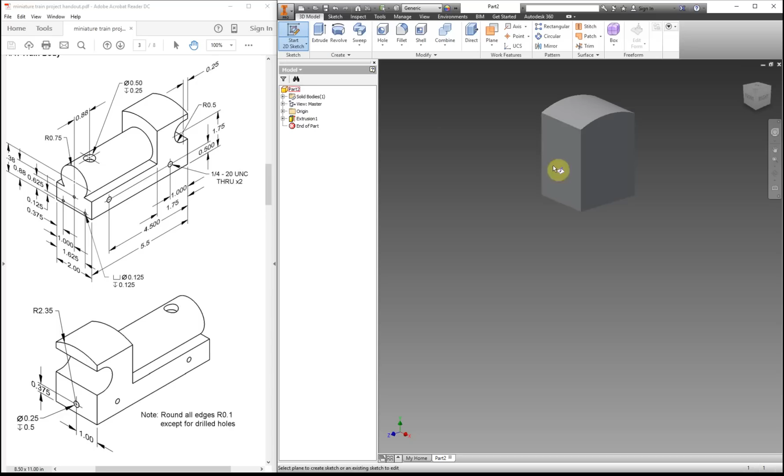So what I'm going to do again is another 3-point rectangle. So I'm going to click on this edge, that edge, and I'm going to move this up. And this dimension from here to here, if we look back on our sketch, it's going to be this line. You're going to look over and right here. So 0.88.

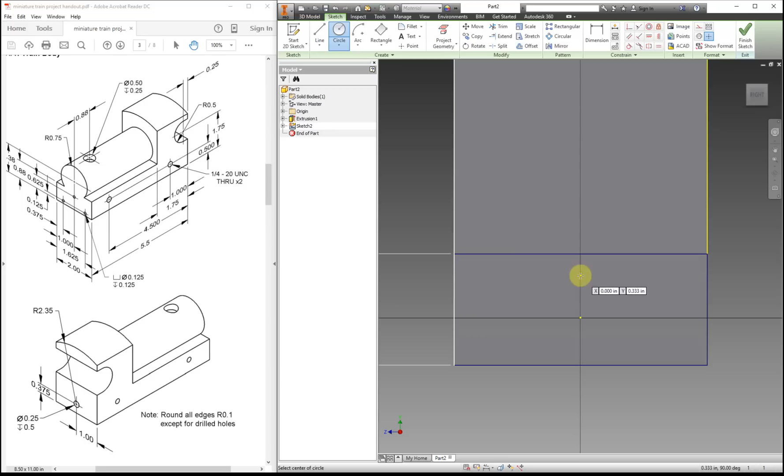The next thing I'm going to bring in is a circle. So I'm going to try to get the little dotted line to show up. I'm not sure if you can see it in the video, but there's a little dotted line that'll show up right in the center. Kind of helps line everything up. And you just want to make sure you don't connect it to there because that's not where it should be. So just click a little bit further down for right now. Okay. So we're going to dimension this to the center just to make sure you got it in the right spot. Also, it locks it in place.

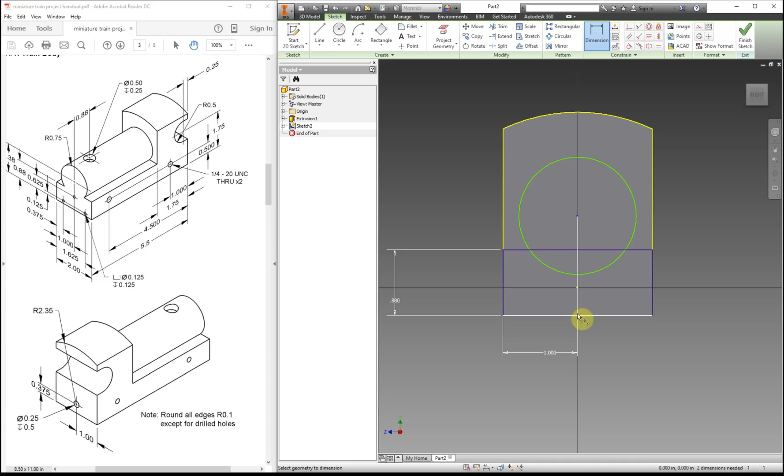And now we want to lock in the center of where that should be. And if we look back on our sketch, here's the center. And it is, let's see, oh, it got cut off a little bit. There it is. So 1.38 inches.

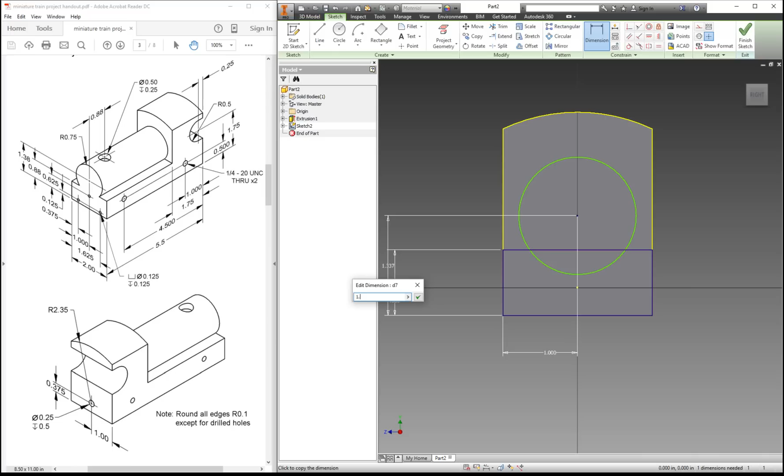And again, it shows a radius instead of a diameter right here. So we can type that in as 0.75 times 2 or just 1.5. Alright, so for this one I'm just going to leave it as is and I'll show you what to do for the extrusion.

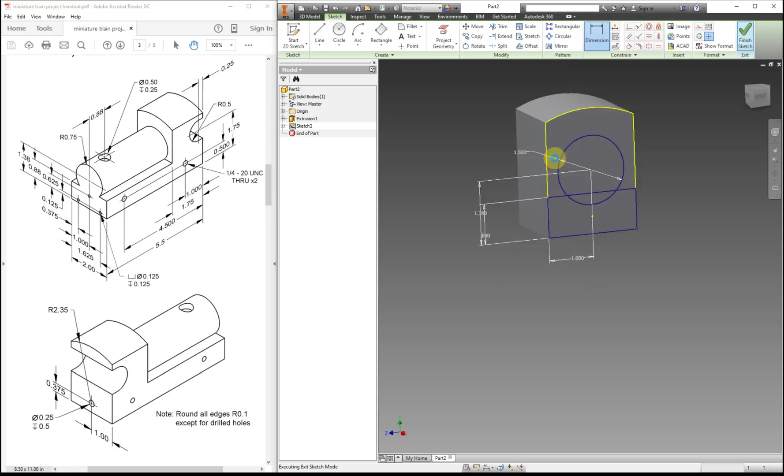So you can see, unlike before, there was only one shape and it would extrude. Now we have two shapes, so it doesn't actually know what to do. Actually, we have three shapes. So we need to tell it that we only want these bottom two. So our rectangle and our circle.

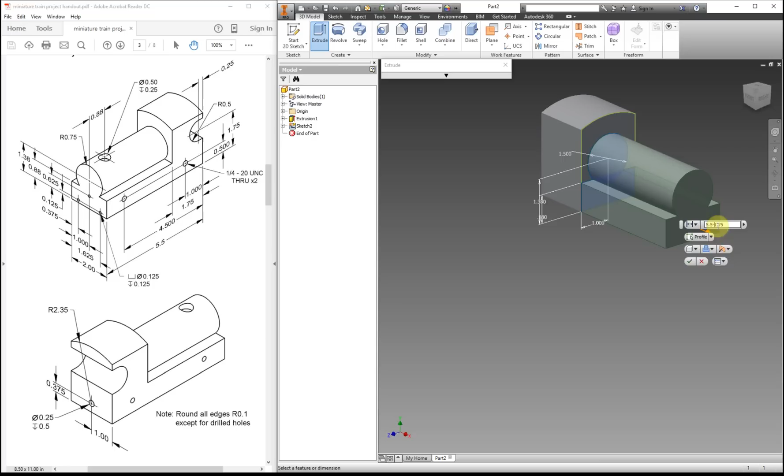And our dimension for this, if we look at our train, it doesn't let you know what the distance is for here to here, but it does let you know the distance of the entire train, and we have the distance of the back of it. So we could just type that in as an equation. So I'm going to type that in as 5.5 minus 1.75. Alright, so it's starting to look like a train body now.

So the next thing I'm going to do is cut out this little chunk right here. So start a sketch on the side. We need to project our geometry first, just so you can see the edges. Plus you need something to dimension off of. And again, I'm going to start with a rectangle, the 3-point. Just makes it a little bit easier sometimes to lock everything in place. If you wanted to for this one, you could do the 2-point rectangle. Not really important which one you use.

Next thing is we're going to add in this dimension for right here. And this one's a little bit harder to tell what's going on, but I'm going to add it in as a rectangle for this part and a half circle or an arc for this other part right here. So our dimension from the back edge of our train to the edge of what will be our rectangle is 1/4 of an inch. And from the bottom, let's see, for this dimension it goes from the center.

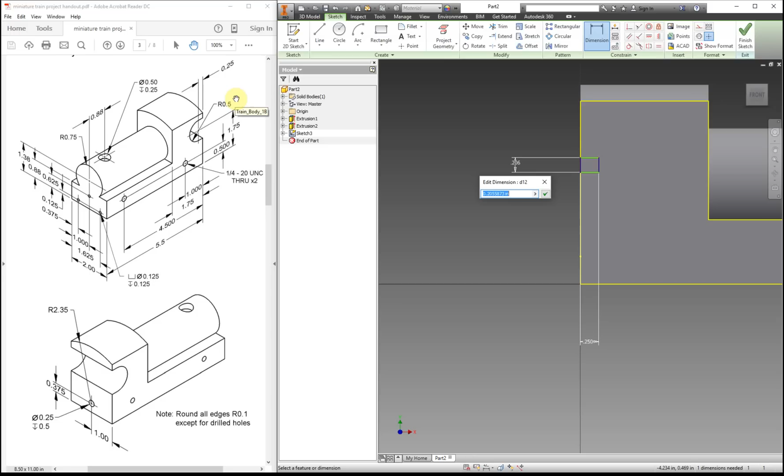So actually we're going to have to put the arc in first. We get a dimension from here to here, so it'll just be a little bit larger and the correct size for our arc, and we can just kind of place the arc in. So for that one we have a radius of 0.5, so that means the diameter across, or the height of what we need for our shape right here, would be 1 inch. And since we have green lines, we can move it around, so I'm going to shift that down a little bit. We can add in the arc.

The one that I'm going to use is the center point arc. It's going to be a little bit easier to use than the 3-point arc. The reason for that is we can lock it right into the center of our line. So a little green dot that popped up, that was the center of our line. Now that green dot, we want to click on there, move it over, we want our other green dot. Okay, now we want our dimension from this center all the way down to the bottom. And that dimension is 1.75. So we have that point over, and there's our dimension.

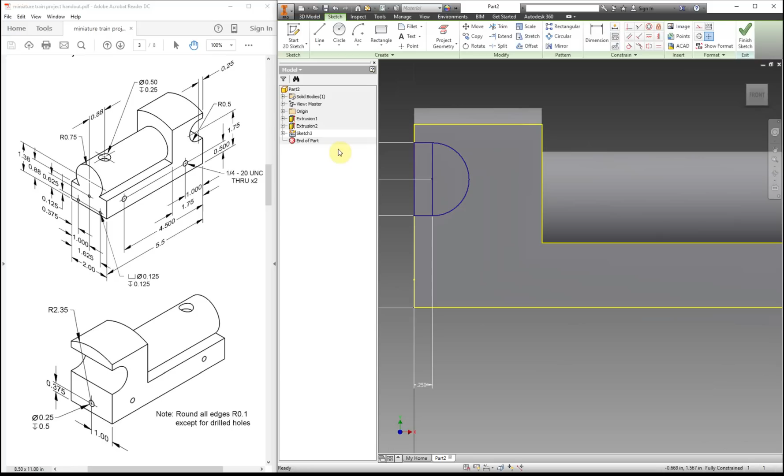So this way we can now finish our sketch. And if you wanted to, you could have went in and turned that line into a construction line. Our extrusion's not selecting it properly. So let's go back to that sketch, and let's change that line to a construction line. Let's see if that fixes it. Yeah, that fixed it. Sometimes you gotta carefully highlight what you need. Sometimes it takes patience. There we go.

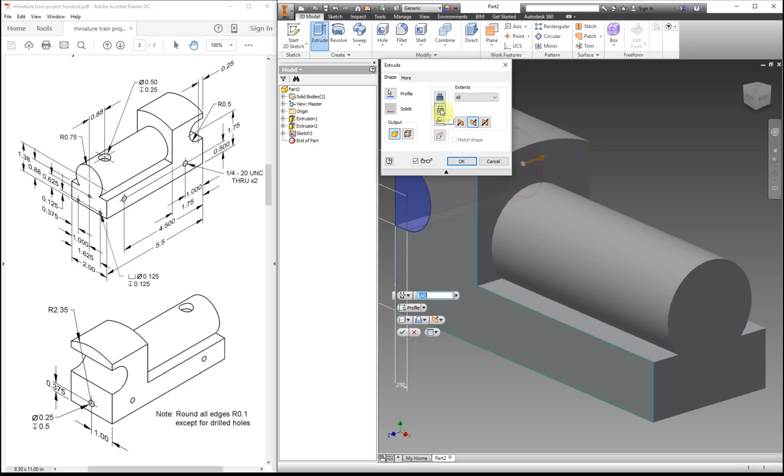Okay, so what we're going to do for this one is I'm going to change the distance to all, and most of the time it automatically switches to cut. Sometimes it doesn't, so if you need to, click on cut, and then you can click on OK. Cut through our entire shape. So if we turn to the side, you can see it cut through. The reason why doing the distance as all is a lot easier is if you change your dimension or realize you dimensioned something wrong later on, if you change maybe the width of the part, it'll automatically cut through the entire part no matter how wide you make this.

The next thing I'm going to do is actually start adding in all of our fillets and our rounds. The reason for that is it's a lot easier to do right now than adding it in later. So if we click on fillet, we actually have two buttons we can use right now. Fillet, all. So that is all the fillets. The way you can remember fillet versus round: round rounds the edges. Fillet kind of fills in those edges. So if this was an actual object, this would have to add in more material. Rounds would actually be removing material.

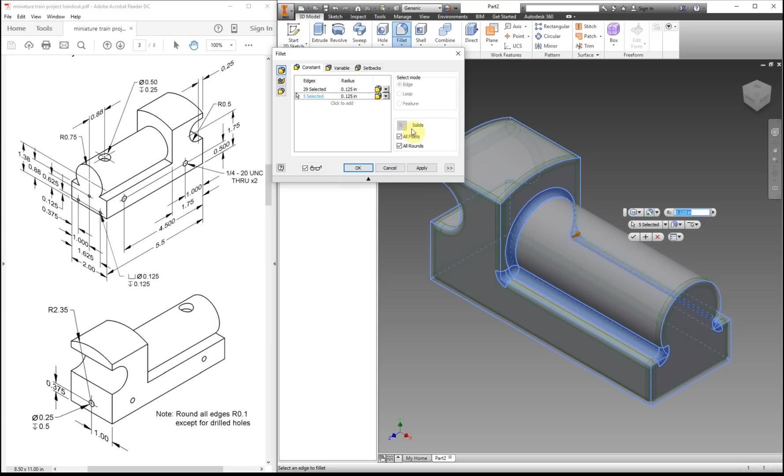And then, let's see, fillet. Round all. I know the directions just say round all edges, but I will leave this up to you if you would like to also add in the fillet. Personally, I like both of them. It makes it look a little bit nicer, but that option is up to you. But just make sure you do round all the edges. And then apply, so you can see how it looks now.

And now we can add in the holes for our part. So we have a couple holes that we need to drill in. If we drilled in all the holes first and then we decided to do the round all button, it would try to round all of the holes that we put in also. And that's not what you want to have happen. You want to have nice sharp edges for all the holes that are drilled into the part.

So the holes that we're going to put in right now, we will do these side ones. These will be where the wheels get attached to the train with the axle pegs. So we're going to click on 2D Sketch. Alright, and we're going to click on this side. Press the home button. So for your geometry, you're going to want to make sure that you click the very bottom edge, not this part, because this isn't going to give you the correct dimensions that you need. So the very bottom edge and this edge right here.

So now I'm going to add in 2 points. Right now it doesn't matter where you put them because we're going to add in the dimensions. But the reason why we're using points instead of doing circles is because we want to use the hole tool instead. So the dimension for this first point from the edge is going to be 1 inch. And from the same edge over to here, we are going to have it as 4.5.

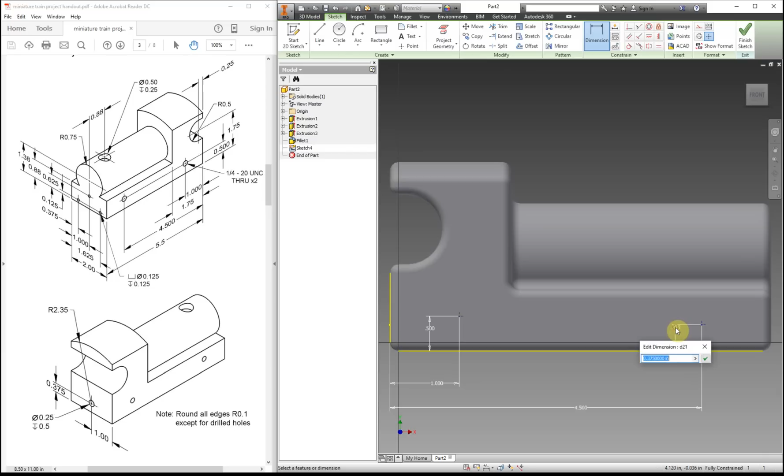And now we need our dimension from the very bottom. And that is located right here. So we have 1/2 inch. And same dimension for this one. So 1/2 inch. So finish. So the nice part about this is when you click on the hole, it automatically selects both of them. You don't have to do that yourself.

Okay, right now we want to make sure that we have everything selected the same. So we want it to be 1/4 inch for the diameter. And then we have 20 threads per inch, and it's coarse thread. So now we have to select our thread. So now we have the thread selected. Now we have our options for thread. So we have our size, 1/4 inch. Let's see, 20 threads per inch, coarse thread.

And one thing that students tend to miss on this one is full depth. You got to check that little button. The reason for that is if you don't, let me uncheck that again, you see this right here? So the thread will only go in 1/2 inch, and that's not what you want. We want it to go all the way through. So make sure you check that button. And then, okay. Alright, so now if we go to the other side of the train, you can see those little bits of thread. If you did not check that box, you won't have that thread show up.

Alright, so our next thing we're going to do is we're going to put some holes on the front part of our train, but if you were looking at it for a work drawing, that would be considered the right side. So we're going to start our sketch. And again, our lines, you want to make sure it's the very outside of the train, not this part, very outside of the train. So this time we're going to put in 3 points, going to be placed roughly around here.

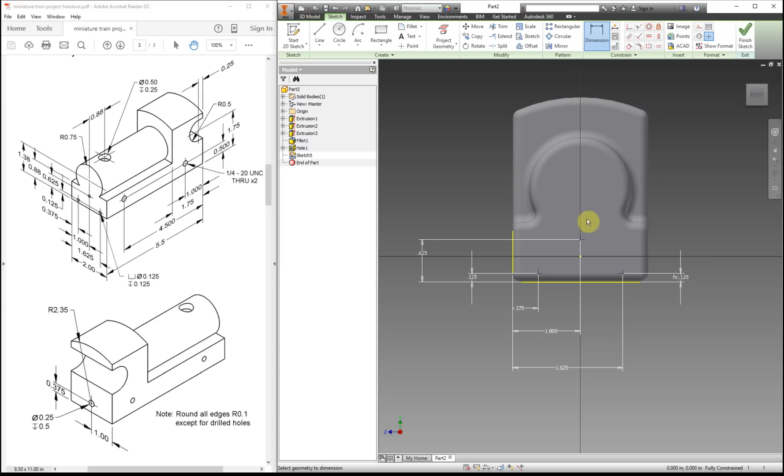It's not quite what I wanted. So our last dot from there to there, and that dimension is from here, go from the line over, and we have 0.625. Okay, so we have our three dots, or our three points.

So we finish our sketch and use the hole tool again. This time we need to change some things—we need to change the termination to a distance, and we do not need thread, we just want a simple hole. You can see the symbol right here; that means it's a flat bottom, so we want to change our drill point to a flat bottom.

And for the diameter of the hole, make sure you select the correct one—one's for the depth, one's for diameter. We want it to be 0.125. And our depth, this symbol right here is our depth symbol. We can see that actually it's the same dimension, so that makes it a little easier in case you mix the two up later for the next one we're going to put in.

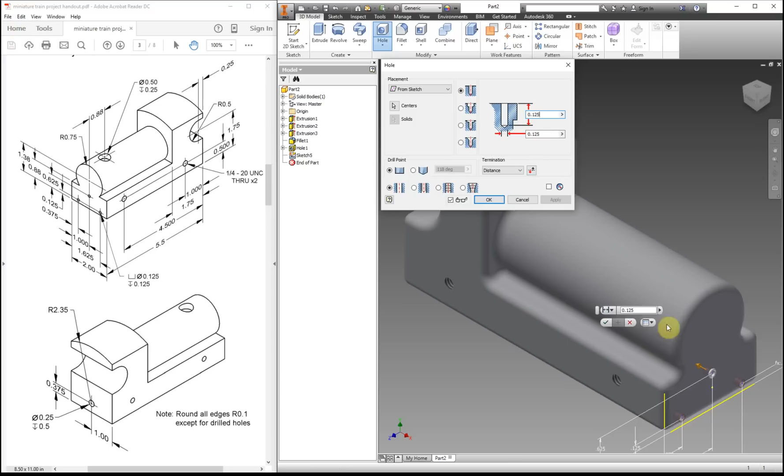This hole right here will be different. What we're adding the hole in for right now is for our Cowcatcher, and we can add in the one on the back. If this was on our work drawing, it'd be the left side. I'm going to click on this surface.

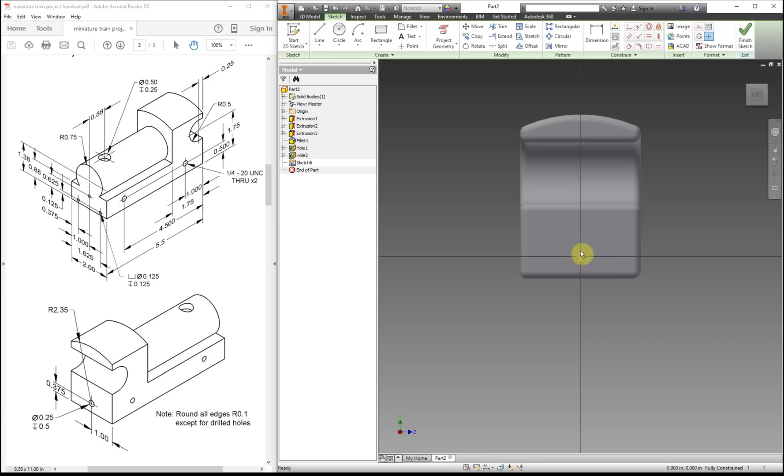This one is actually a lot easier because of how I set it up originally. That point used for the circle we made first is the same point used for putting in that hole. You can just click on the point tool, click on that yellow dot, and it'll turn green if it's locked in place. Unfortunately I can't zoom in to show you, but the point instead of being blue is green—you'll just have to trust me on that one.

I'm going to click finish, then click on the hole. For this one, we want the diameter to be 1/4 inch, and the depth to be 1/2 inch.

And for this one, I'm just going to leave it for a flat bottom. Okay, so almost everything's done. The only thing we still need to do—oh, and that hole we just added is for the hitch magnet, and if we were adding on more train cars, that's where the other ones would connect.

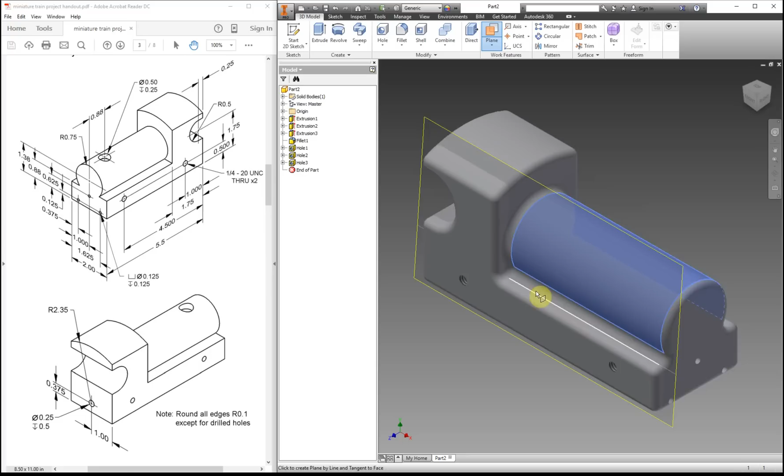Alright, so the last thing we need to add is this hole for the train stack. What we could do is put in a plane. We're going to click on here, and we want that plane to be level with the top, so you need to select another surface to line it up—I'll use this one right here. So here's our plane.

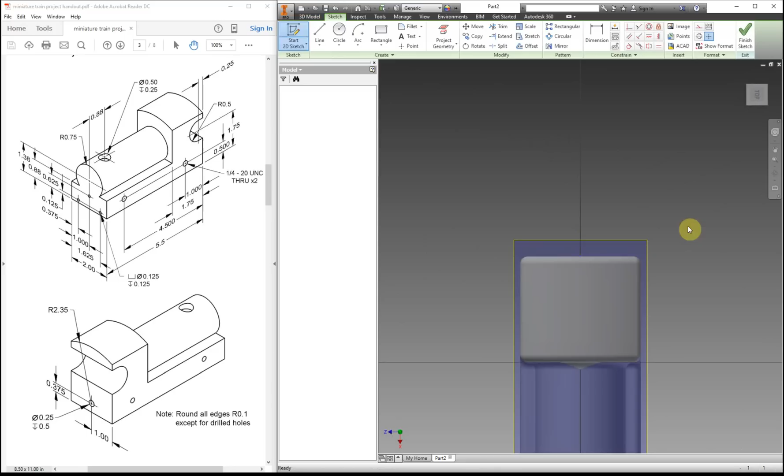So you're going to start a sketch. The strange thing about this is if you click on it, you click through it, but if you click the edge, then you click on it. It's a little weird, but you've got to remember that. Again, we need to add in our geometry from our last layer, and remember you need to click on the very edges—you've got to get the very edges for this.

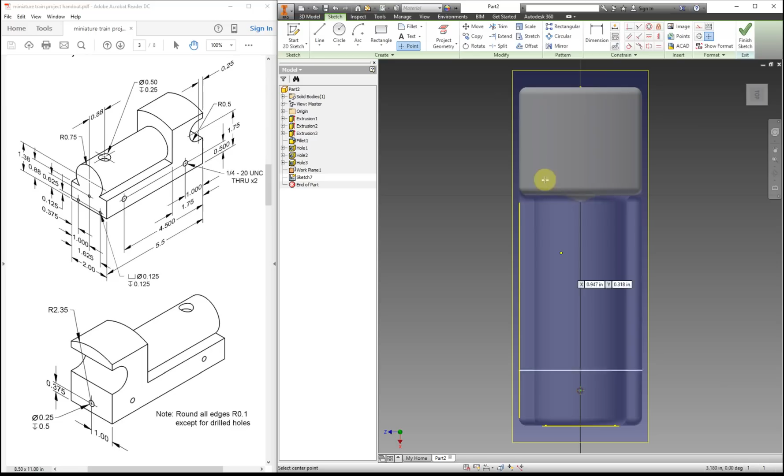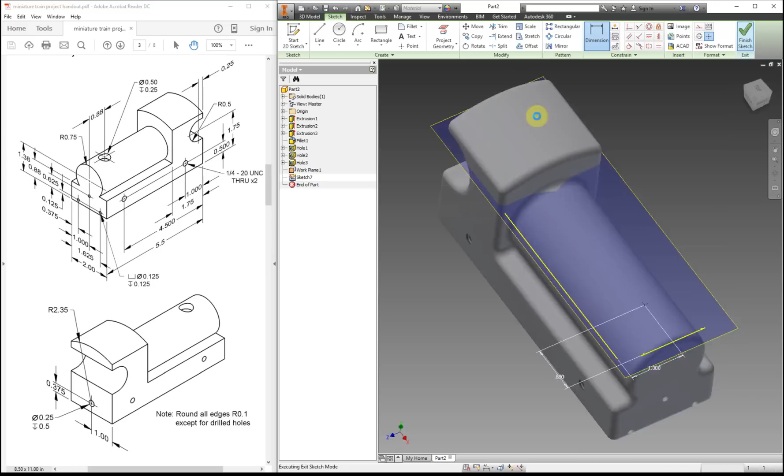So we're going to put in another point. We want it nice and centered, so it's 1 inch, and from the very bottom of our view right here, we want it to be 0.88. We're going to finish, use the hole tool, and for this one we want the diameter to be 0.5 and our depth to be 1/4 inch.

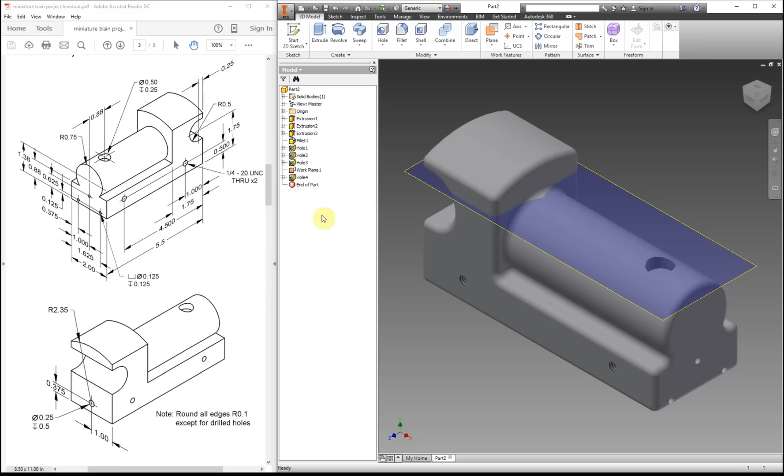And right now we have that work plane that doesn't make our train look that fantastic, so what we can do is right click on your work plane 1 and uncheck visibility. And now we have a finished train body.